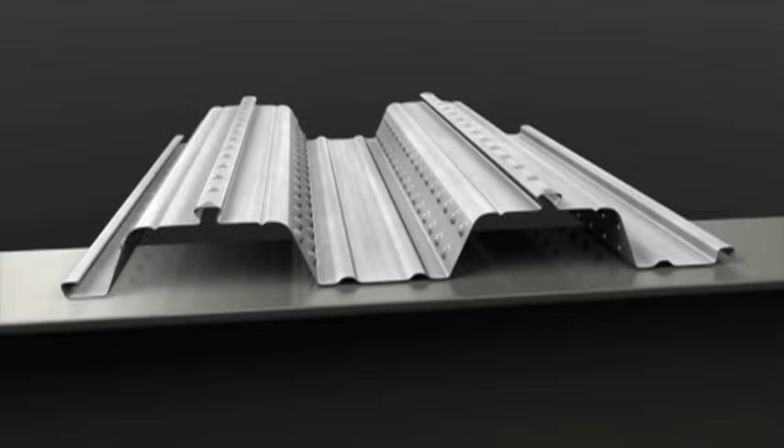ComFlor is a composite steel floor decking, ideally suited to modern high-rise structures. Available in both shallow and deep decks, the ComFlor range represents some of the most economical floor solutions and is arguably the most efficient choice of profile currently available anywhere in the world.

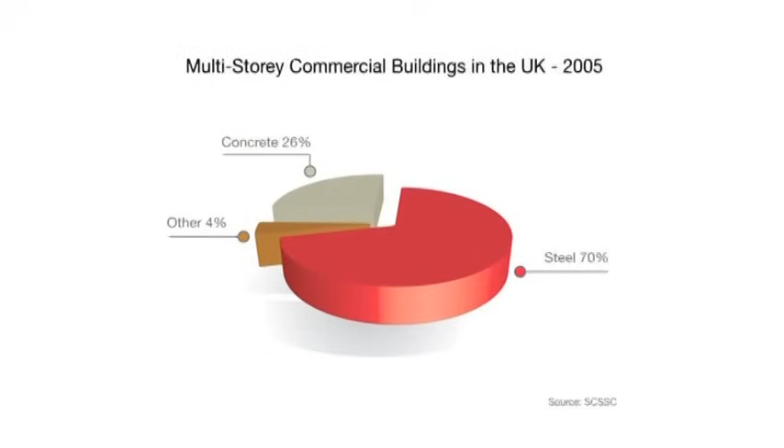A composite floor is one in which the steel deck mechanically bonds with the concrete topping, so that the steel and the concrete work together to form the floor structure. The technology reached the UK at a time when concrete had a dominant three-quarters of the market for multi-storey building. The introduction of steel profiles using composite slab technology changed the market forever. And today, 70% of multi-storey buildings are steel framed.

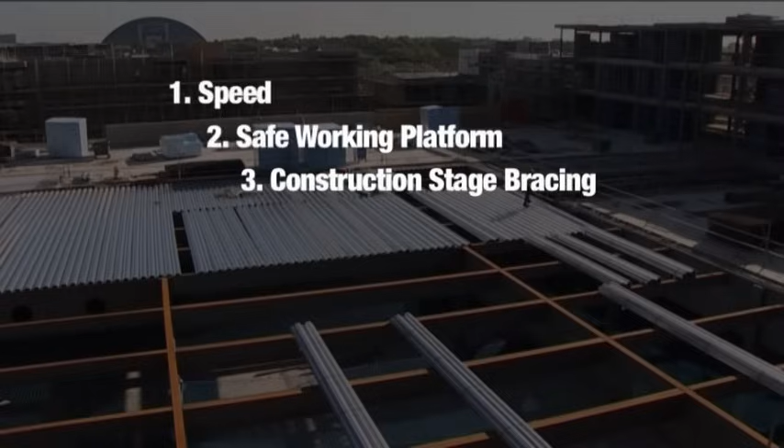The principal benefits of building with a composite steel flooring system are increased speed of construction. The deck instantly acts as a working platform. Construction stage bracing, providing diaphragm action to the floor. Reduction in the weight of the floor. Overall building height reductions. Inherent fire safety properties, and the simplicity of attaching building services.

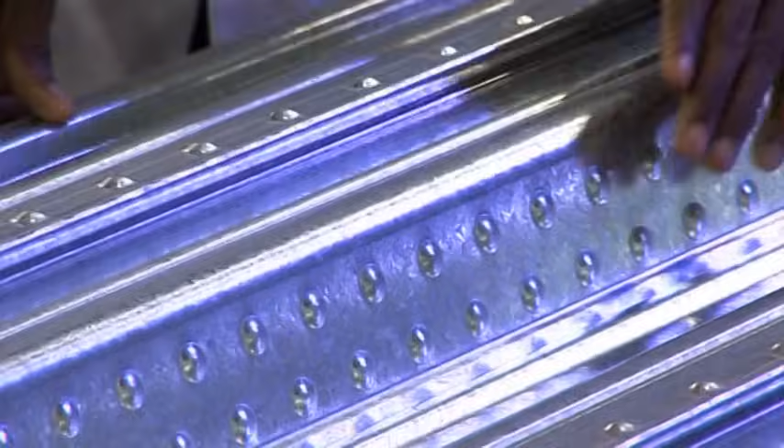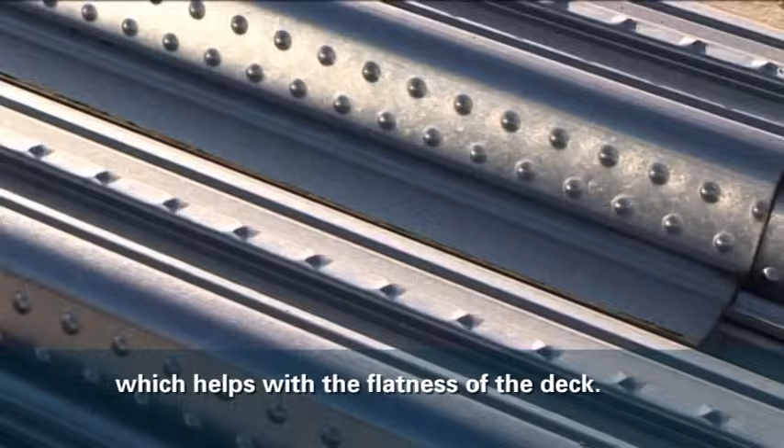Circular embossment in particular reduces the amount of distortion created during the rolling of the deck. This later leads to reducing residual stresses within the profile, which helps the flatness of the deck. The embossment along with the round edges increases shear bond action between the deck and the concrete slab, and has led to an increase in the m-k value found from the tests that were carried out here at Imperial College.

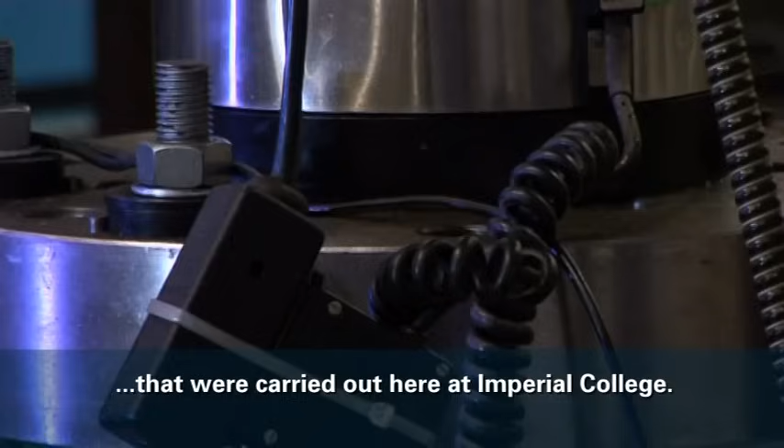As with any construction product, this decking is tested to European standards: Eurocode 3 for cold-formed steel and Eurocode 4 for composite slabs and beams.

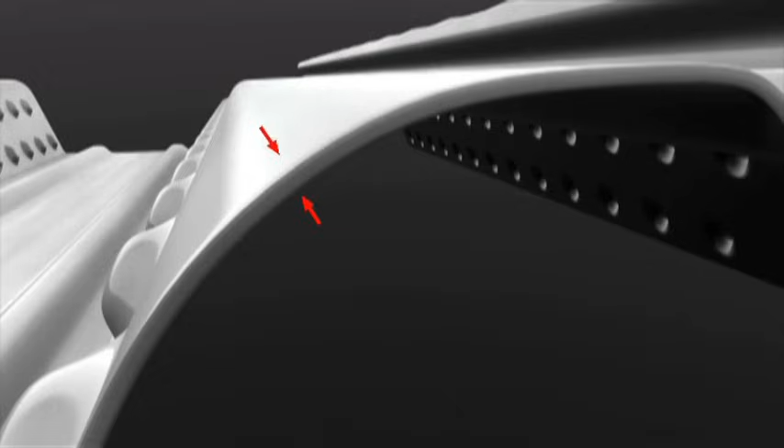The ComFlor 80 and the ComFlor 60 profiles were designed to span further in the unpropped condition than any other profiles in the world. Having a profile that spans further is only half the story though, because in floor areas where the spans are not so important, it means the gauge thickness can be reduced. Smaller gauge thicknesses mean that the overall floor cost can be dramatically reduced.

Deck design is not an exact science, however, one of the key areas for the design of these profiles is to try and ensure that the cross-section of the profile is fully effective. The introduction of the large corner radii is to reduce the individual element lengths of the compression zone of the profile. The CF60 and the CF80 have circular embossments.

The purpose of these circular embossments is to ensure that the concrete works with the decking. They put less stress into the profile, which actually means that there's no twisting of the profile. So when it's laid in situ, the decking actually sits firmly onto the top flange of the beam.

When you look at the cross-section of these new profiles, you'll notice that the bottom stiffeners in the trough have actually been pushed apart, as opposed to a traditional central stiffener. By doing this, the shear stud connector can be placed centrally within the trough, and this means that the stud will achieve its full capacity.

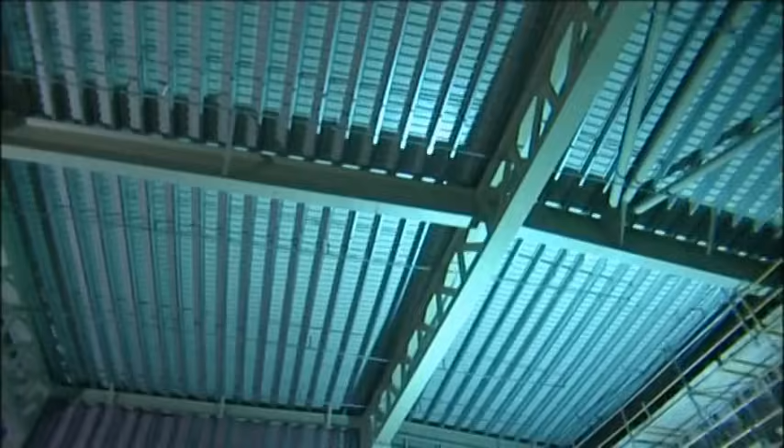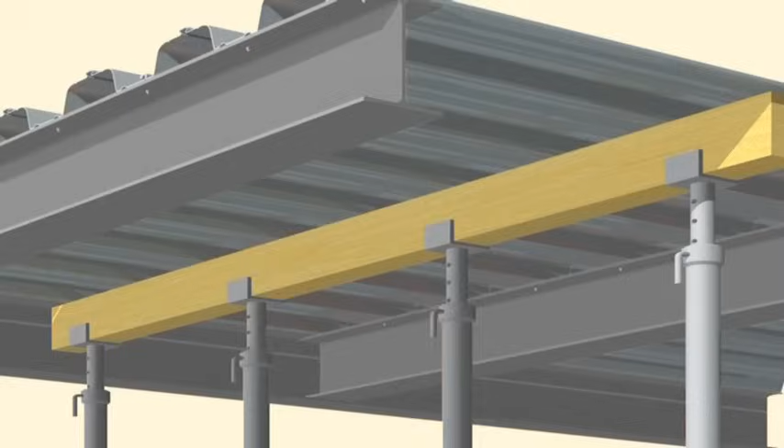ComFlor decking will span further than any other flooring deck profile. In the double span condition, ComFlor can span in the region of 4.5 to 5 metres without the need to prop. In a typical grid structure, traditional composite decks require a greater frequency of beams. The use of ComFlor can reduce the number of components by as much as 25%.

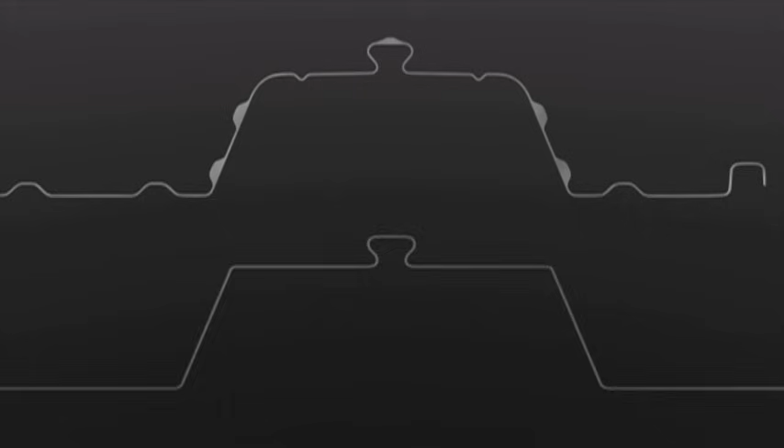Let's consider a typical crest configuration with a central stiffener. As the horizontal elements will at some point be in compression, it is important to keep the individual b/t ratios for these elements to a minimum. The location of the shear stud connector within the deck profile is of paramount importance. The latest ComFlor profiles only allow the studs to be centrally placed, which is the optimum position for developing the stud capacity.

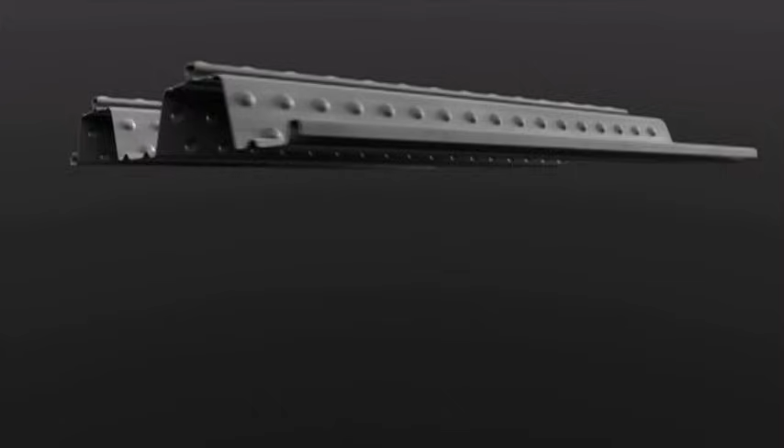Extensive testing and fire engineering work have resulted in fire ratings of up to 4 hours when using a light mesh within the composite slab and no protection to the deck.

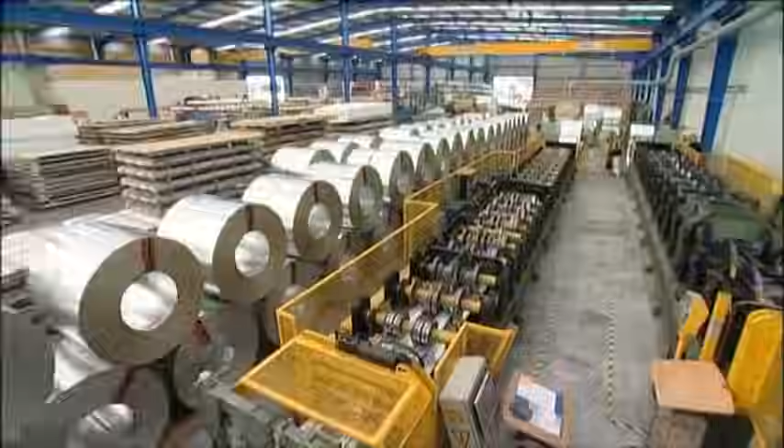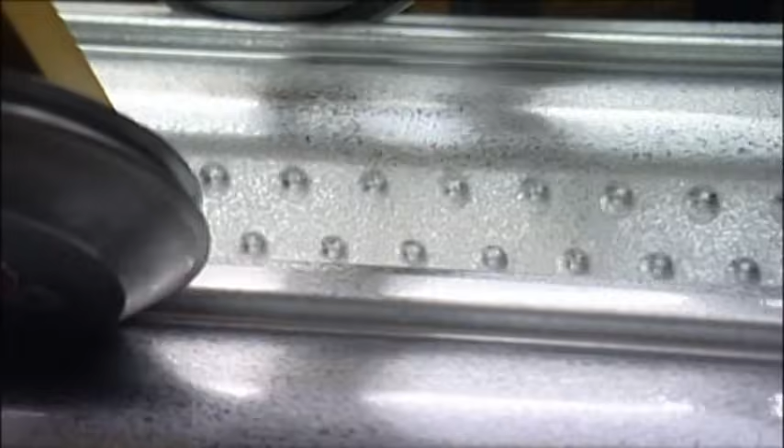We are proud that we have a very high quality controlled manufacturing process. At the beginning of each order, then at regular intervals, quality checks are carried out on the ComFlor. Only once these checks are satisfied will production continue.

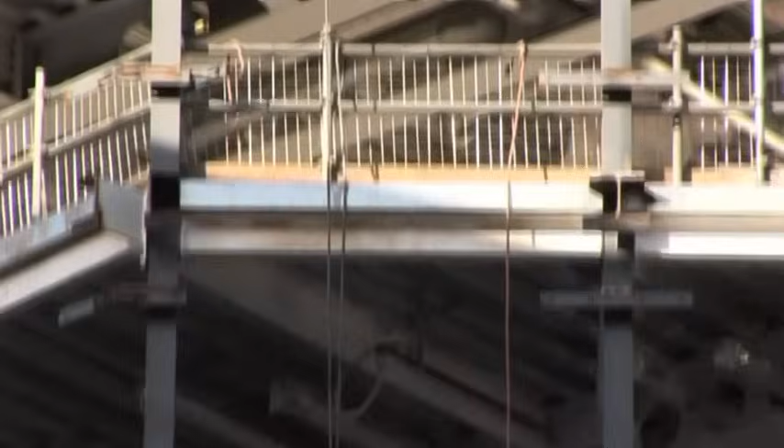ComFlor has gained great favour since the launch of ComFlor 80 in 2004, with hundreds of thousands of square metres supplied all over the globe and demand only growing as the world realises the great benefits of the ComFlor composite floor system.

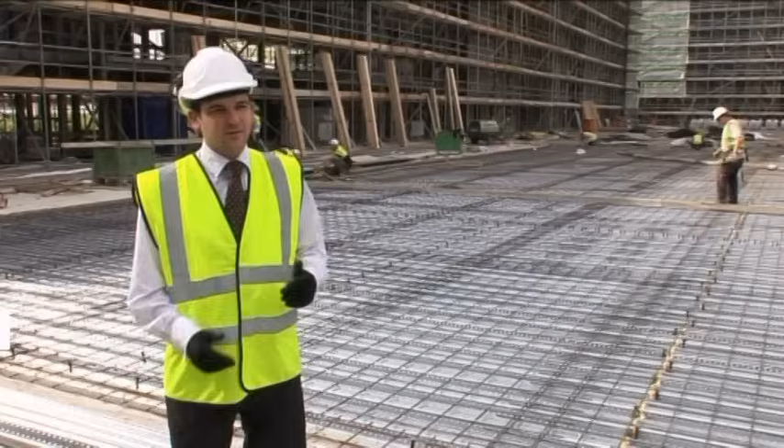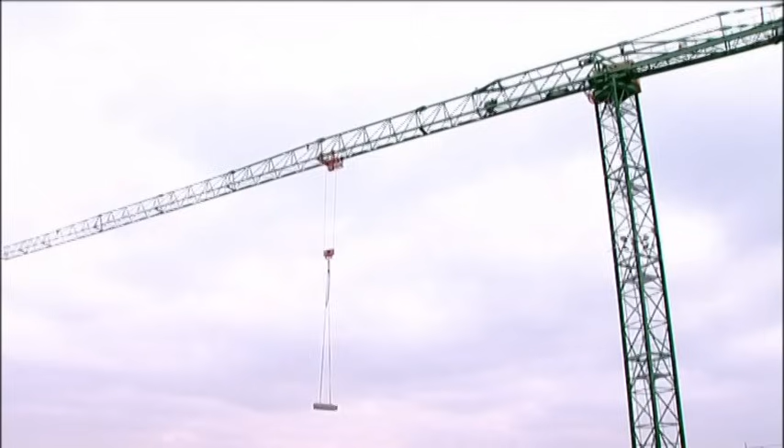Essentially, it starts when we've got our steel frame erected, and obviously we hang safety netting beneath the floor where we want to be working. The steel composite panels actually come in bundles on the back of a flatbed and are lifted onto site by crane, and typically then we take from these bundles of, say, 15 sheets, they're actually placed in position and then fixed to the beams.

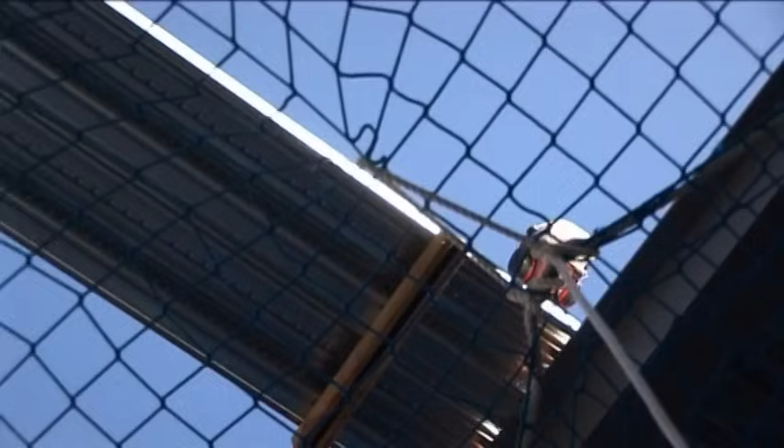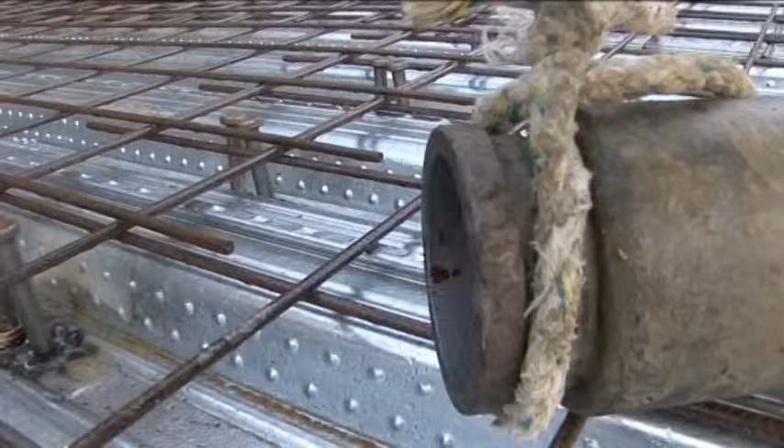Once the deck is then laid in position, it becomes a working platform, but also is a crash deck, and so allowing work to carry on unimpeded on the levels below. The shear studs are then taken and placed in position through deck welded onto the composite beams. The steel mesh is then laid, concrete poured, and then it's finished.

ComFlor is a high-quality composite decking product, manufactured with tight controls on testing and packaging. It has been proven to provide significant savings in both construction time and overall structural costs in buildings all around the world.

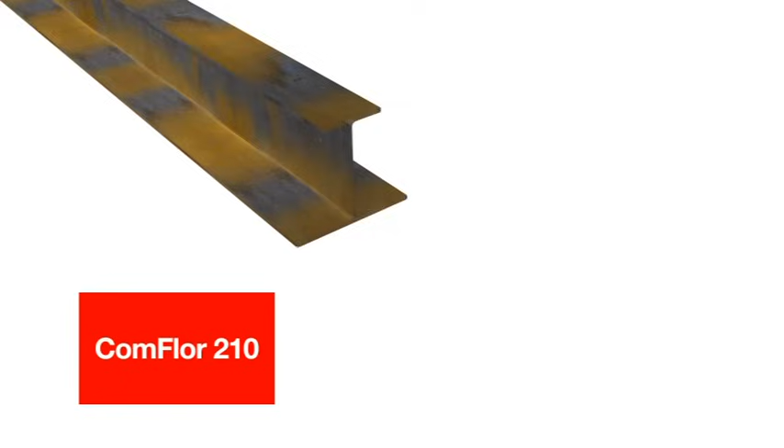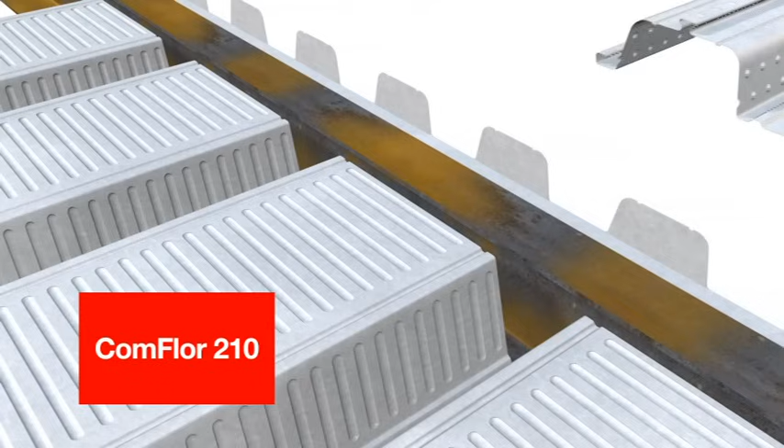ComFlor 210 was introduced to the New Zealand market in 2002 and has been used in the United Kingdom for over 20 years. ComFlor 210 is best used in a single span configuration, where the 210mm deep profile is fully or partially incorporated within the height of the supporting beam, resulting in a reduced story-to-story height when compared to using metal deck laid directly on top of the beam.

ComFlor 210 is very economical in terms of concrete volumes used. This is due to the deep beam-type troughs that provide the spanning strength, while the broad top of the profile minimises the amount of concrete used overall. ComFlor 210 suits construction that requires large spans, but also demands a thin overall floor system, that is the total floor system height inclusive of the beam.

ComFlor 210 has the longest unpropped spanning ability, over 5-metre beam centres. When temporary propping is used, spans of over 8.5 metres are possible.

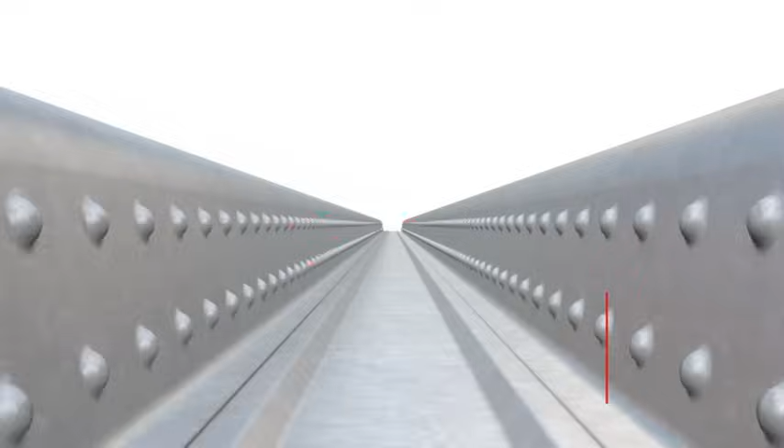ComFlor 80 was introduced to the New Zealand market in 2005 and has been used in the United Kingdom since 2004. ComFlor 80 is best used where long sheets continue over multiple beams to fully utilise the fantastic spanning capabilities and construction bracing properties of ComFlor 80. And as such, it suits high-rise construction and where a simple, large spanning and lightweight flooring system is required.

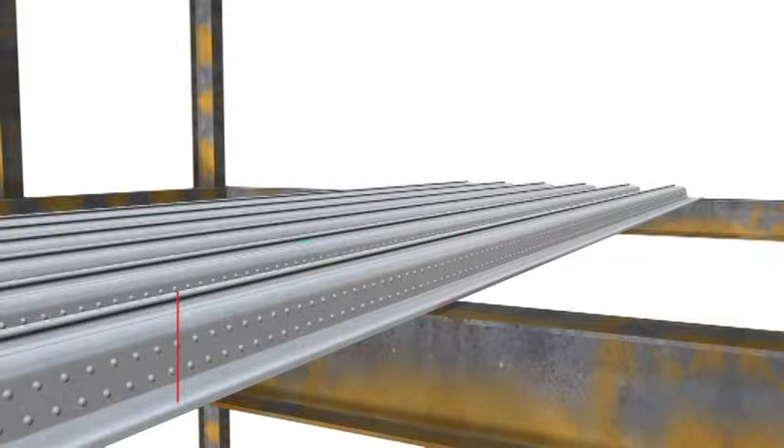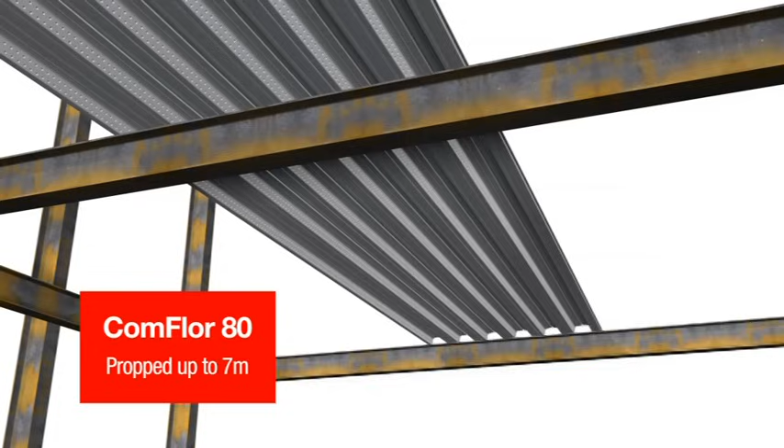ComFlor 80 is a great balance between economic concrete use and robust acoustic and fire performance, achieving 4 hours in fire testing without any modifications to the underside of the decking. ComFlor 80 can span unpropped to over 4.6 metre beam centres. When temporary propping is used, spans up to 7 metres are possible, meaning ComFlor 80 is a great all-round choice for your project.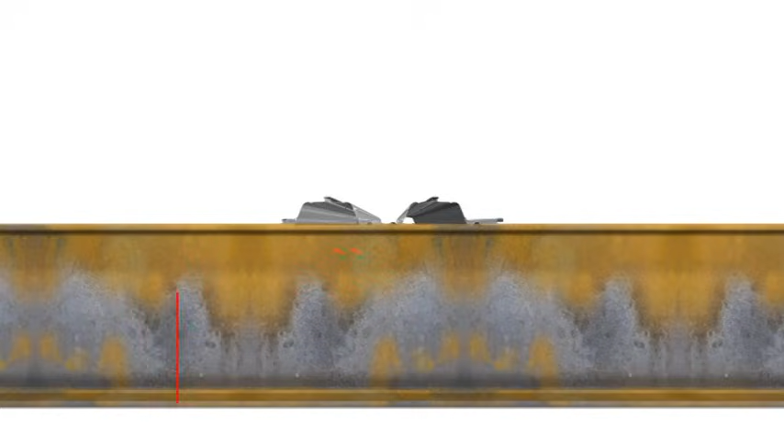ComFlor 60 was introduced to the New Zealand market in 2008. ComFlor 60 is similar in use to ComFlor 80, but is better suited when the thinnest possible slab is required or where acoustic, fire and vibration criteria are critical factors in the design. Using less material width in its manufacture, ComFlor 60 also comes at a lower unit cost than the ComFlor 80.

ComFlor 60 is great for commercial car parks and storage units, or anywhere a long-spanning concrete-efficient slab is desired with good solid performance characteristics. ComFlor 60 can span unpropped to over 4-metre beam centres. When temporary propping is used, spans up to 7 metres are possible.

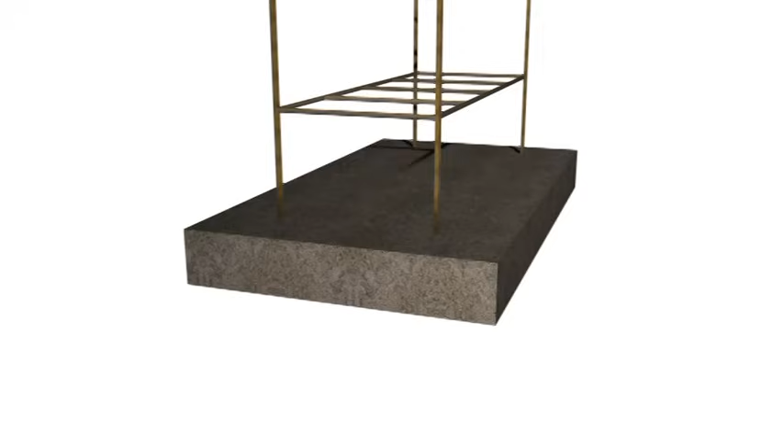The ComFlor range has many uses and can be used to good effect on virtually any substructure desired. The structure best suited to ComFlor, however, is structural steel. Structural steel combined with ComFlor saves weight, which gives huge benefits to foundation design and overall beam and column sizes.

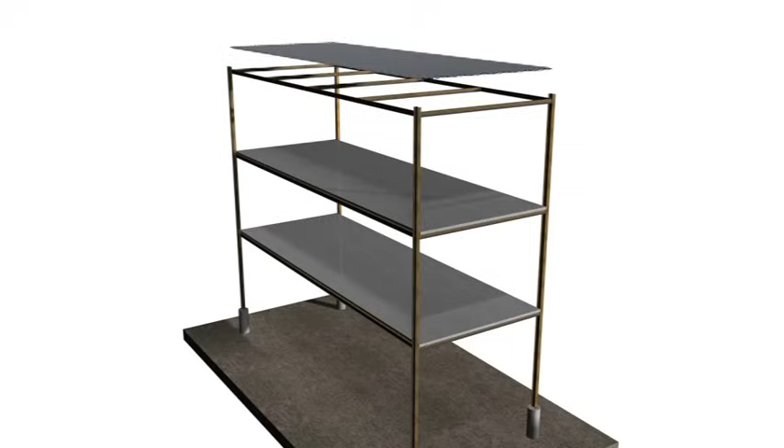ComFlor combined with structural steel speeds up the construction time, with a poured floor-to-floor turnaround sequence of 5 days not uncommon. This can save months of construction time compared to other styles of construction, leading to faster occupancy and return on investment. When used unpropped, services and other fit-out installations can proceed unhindered immediately after the ComFlor sheets are installed.

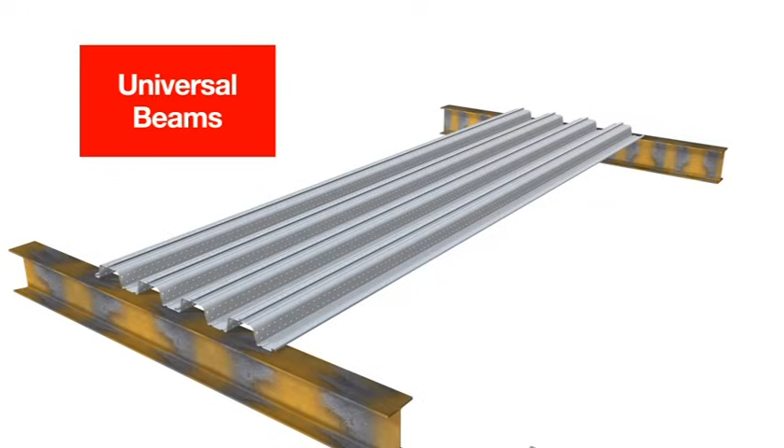Although structural steel is the best option, other support structures commonly used are masonry, precast units such as shell beams, and even in situ poured beams can be used to support ComFlor.

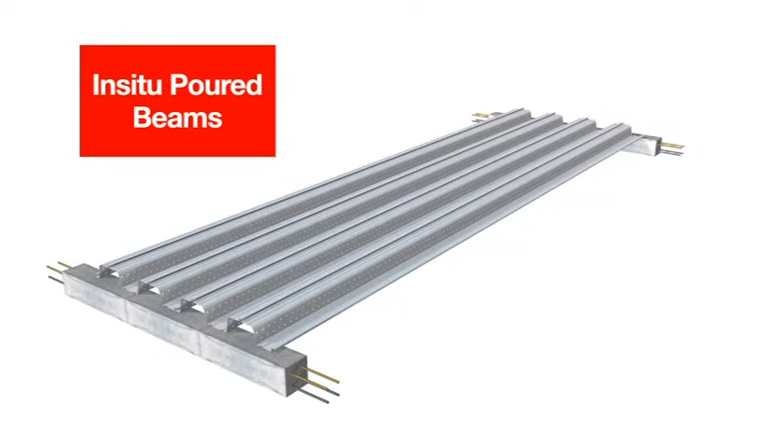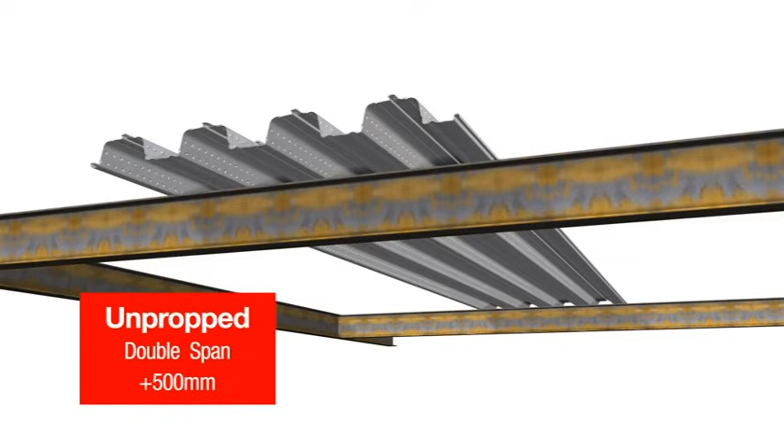ComFlor can be used propped or unpropped during construction. It's best to construct unpropped either as single-span sheets or as continuous sheets. A single-span design can be improved by approximately ½ a metre when continuous sheets are used, reducing the number of beams and saving the project unnecessary costs and construction time.

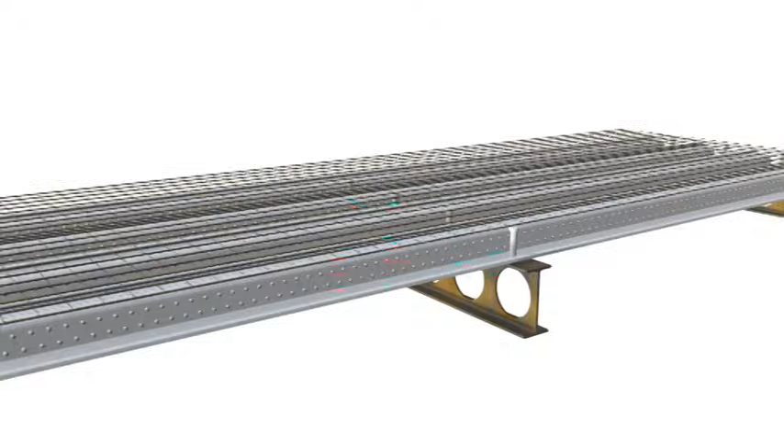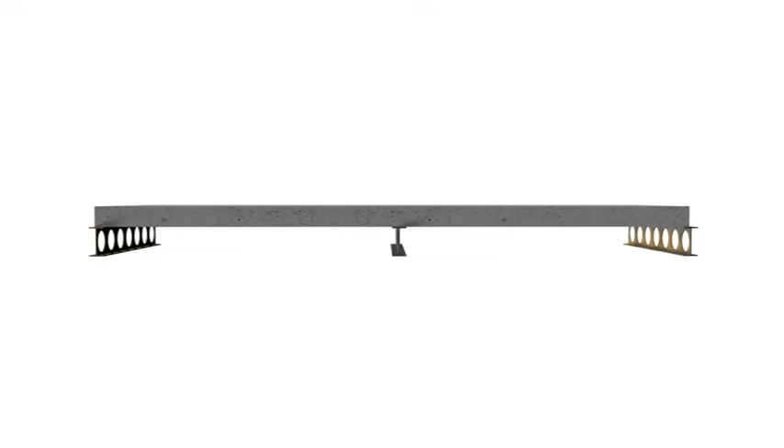If maximum spans are wanted from the ComFlor slab in service, propped construction can be used. Spans of 7 metres can comfortably be achieved, with spans over 8.5 metres possible. So within the ComFlor range, there is a product that will suit any application. ComFlor is a great balance between strength to support the wet concrete load, unpropped up to 5 metres, and lightness, with 2 people able to handle the longest lengths.

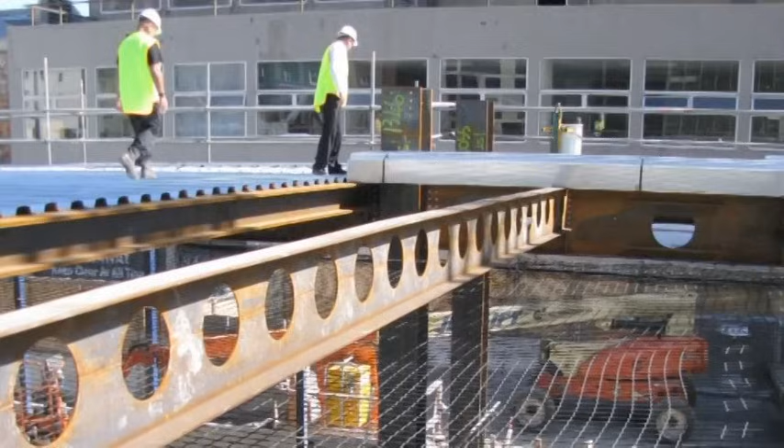The route to market for ComFlor is through Composite Floor Decks Limited. Nationwide, they can supply direct for self-install, or their specialty, a fully installed option including installation of decking, shear studs and edge trimming, ready for the placement of reinforcing and concrete. Composite Floor Decks Limited work professionally to achieve the project's time and safety targets.

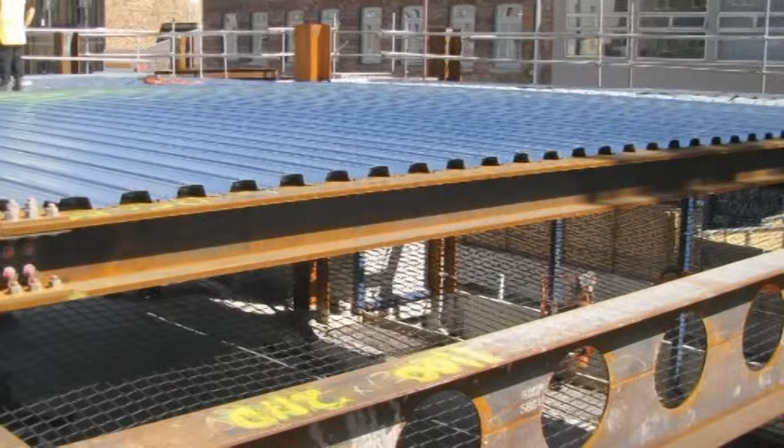Unique to Composite Floor Decks Limited is the use of safety netting. This provides a physical barrier for both people falling from the structure and workers below are protected from objects falling from above. The netting also allows workers to move freely about untethered, speeding up the construction process.

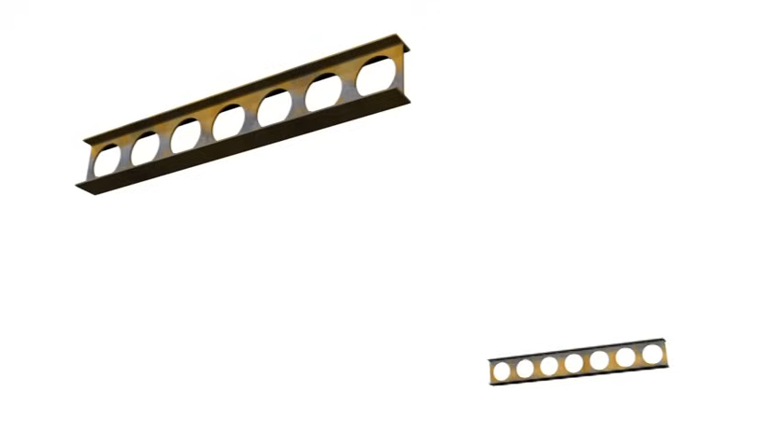There are 2 fundamental points to always keep in mind with regards to installing ComFlor, that if overlooked can cause safety and performance problems. Prop first. If used, temporary propping is best installed prior to laying the ComFlor sheets.

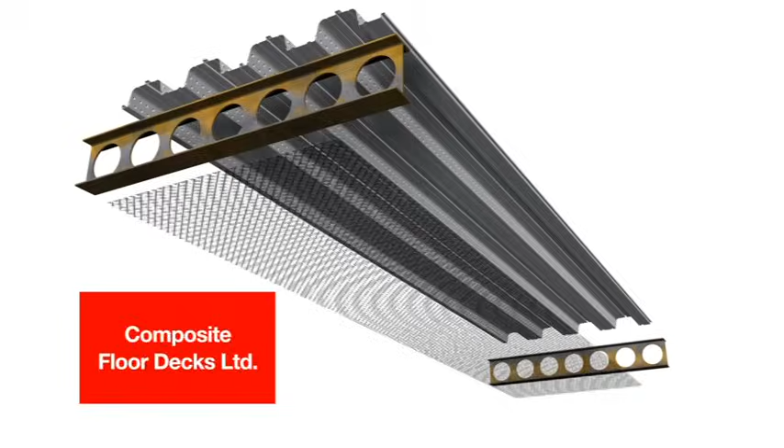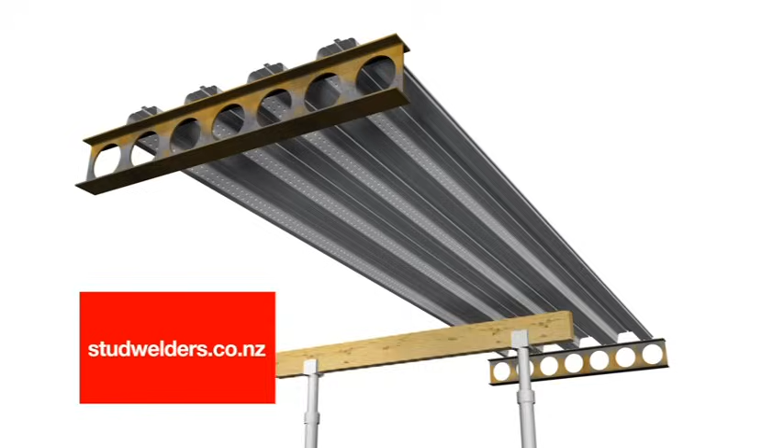Note, however, if using Composite Floor Decks Limited for installation, the temporary propping will interfere with the placement of the safety netting they use. Please contact Composite Floor Decks Limited in this instance. They'll advise if propping can be safely omitted during the ComFlor installation stage, as often it's required during the concreting phase only. Never cut sheets.

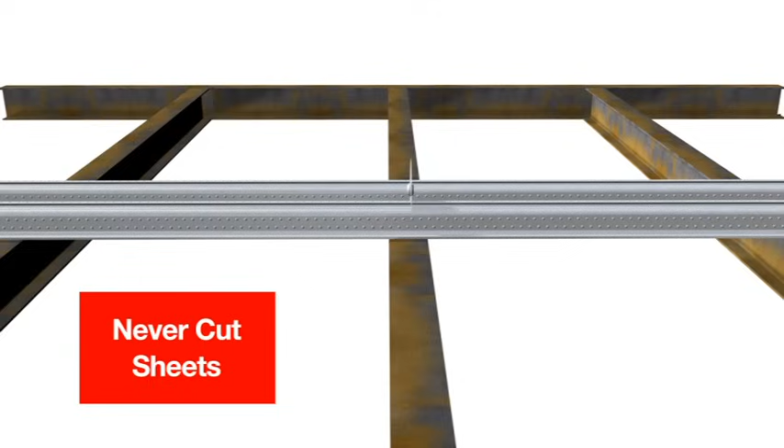ComFlor must never be cut shorter than that supplied or specified on the drawings, without first consulting a ComFlor representative. Cutting will reduce the spanning ability of the ComFlor and may lead to larger deflections during the pour or actual sheet failure under load. And never cut ComFlor mid-span under any circumstances.

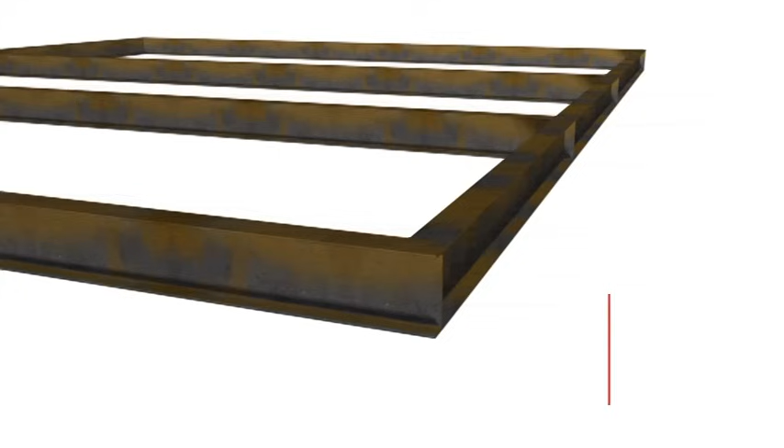ComFlor 60 and ComFlor 80 are installed in exactly the same manner. The ComFlor 210 installation process differs, however, and is addressed separately within this presentation. The strip end cap is most often used and is installed before the ComFlor is laid. For best results when using the strip end cap, the supporting surface should be smooth and free of debris.

ComFlor strip end caps are fitted flush to the inside face of the beam or concrete. Fixings are at third points, located so they don't interfere with the seating of the ComFlor sheets. A great benefit of the end cap strip is that they act as a set-out template for the ComFlor, negating the need for coverage or out-of-square checks otherwise required.

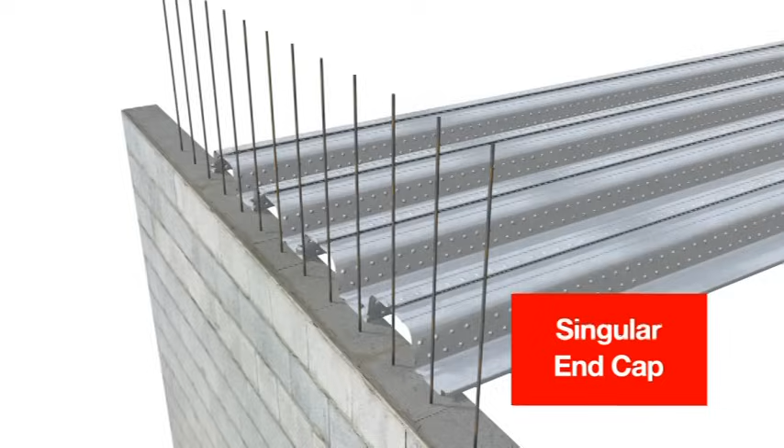The singular end caps are fitted after the ComFlor sheets are installed. They are cut from ComFlor closure angles, supplied in 2.4 metre lengths bundled together. Bundles are cut on-site into 200mm lengths using a metal-rated cutting disc.

Masonry blocks must be solid-filled and developed structural strength before laying and pouring the ComFlor. Care is also required to ensure the grout is smoothed off, providing a flat surface for fixings, and the reinforcing bars do not clash with the ComFlor seating area. Fix the ComFlor into the grout to avoid unsightly damage to the blockwork. For best results in masonry, pre-drill and hammer-in masonry anchors, one fixing per sheet.

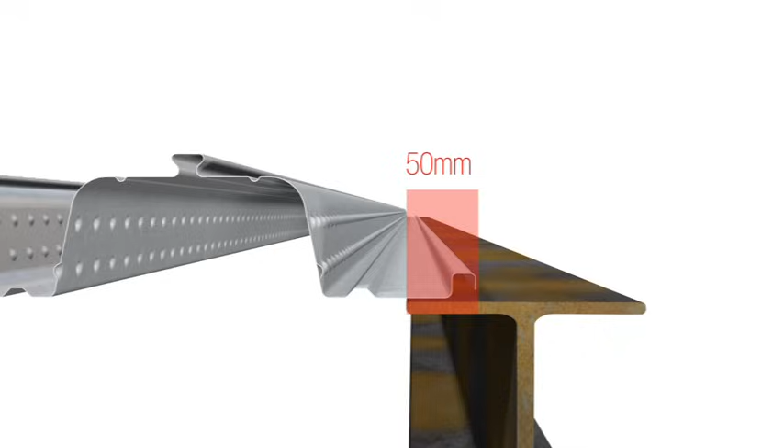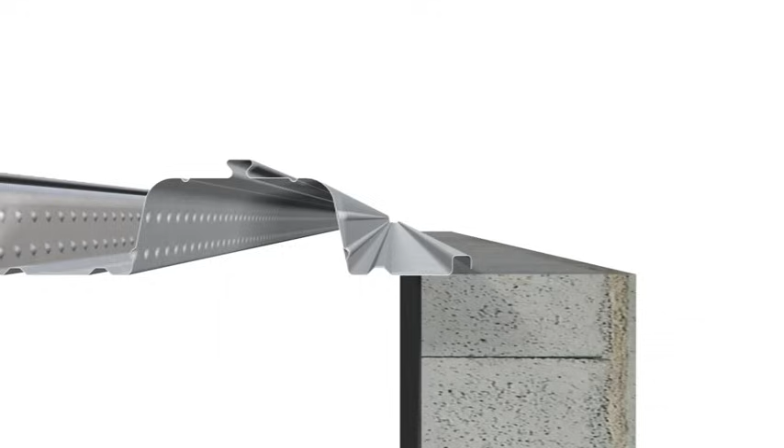Although less is possible, it's recommended the minimum seating for both the side and end of the ComFlor sheet is 50mm onto steel and 70mm onto masonry. This serves both as an additional safety factor, but more importantly avoids the need for precise measuring during installation. The first ComFlor sheet is always laid with the overlap edge facing the starting point.

ComFlor must be fixed to the permanent structure along the side lap at a maximum of 1 metre centres. As each sheet is laid, it is fixed to the permanent support, one fixing per sheet. Please ensure that the drive pins fixing the sheet do not clash with any future shear stud placements. An ideal location is at the base of the rib upstand as shown here. They are then TEC-screwed together through every second pre-punched hole, resulting in fixing at no more than 1 metre centres.

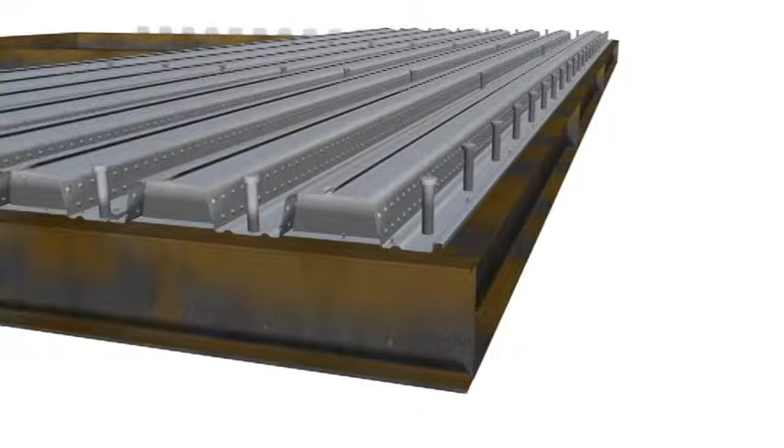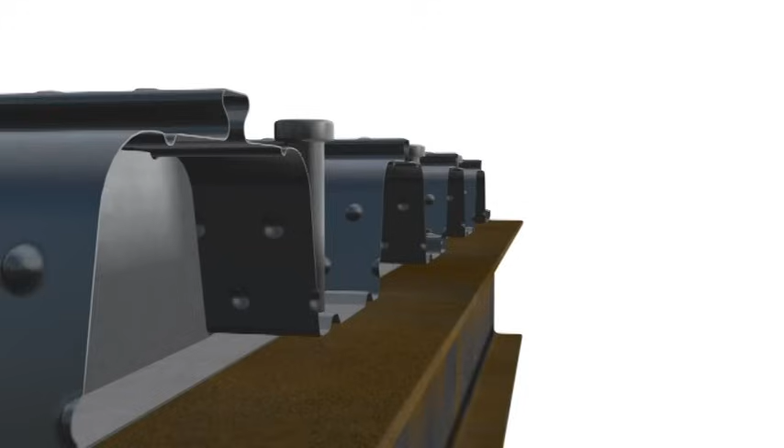Often, shear studs are used to create a composite design, meaning a much smaller beam can be used than for a gravity beam design. Shear studs are best installed in a through-deck fashion. That is, studs are welded on site after the ComFlor is installed. This results in a faster installation sequence, and the ComFlor sheets act as a bracing diaphragm to the structural steel during the construction phase. The top flange of the steel beam must be unpainted and free from dirt, debris and moisture to ensure an effective weld is achieved.

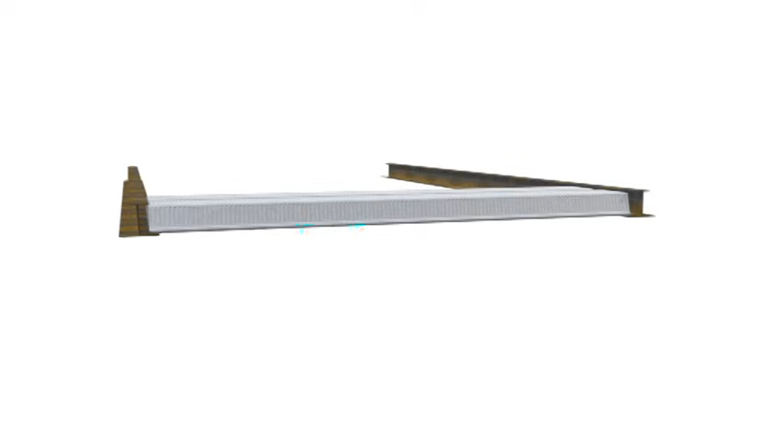ComFlor 210 is typically installed as a single span only. That is, the sheets tend to span beam to beam or wall to wall, and not over the top of multiple beams or walls, as is best practice for ComFlor 60 and ComFlor 80. To fully utilise the benefits of ComFlor 210, it's usually incorporated within the height of an asymmetric beam support system, thereby reducing overall storey height.

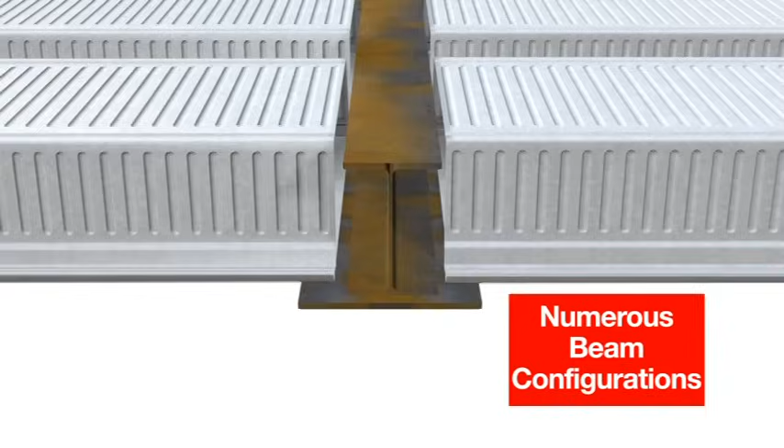Numerous beam configurations are possible with ComFlor 210. For best results, contact your ComFlor representative and discuss your project's needs. Asymmetric beams focus the tensile capacity towards the bottom of the beam, maximising performance while keeping the overall floor height to a minimum. Fabricated asymmetric beams can currently be sourced from Steltec, Cellbeam and Fabsec.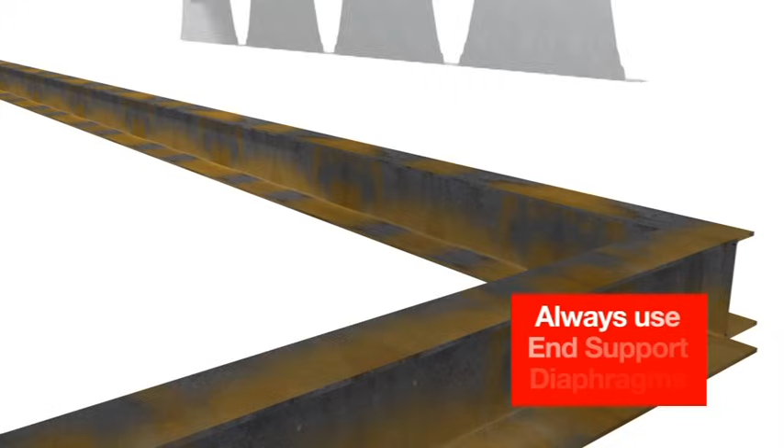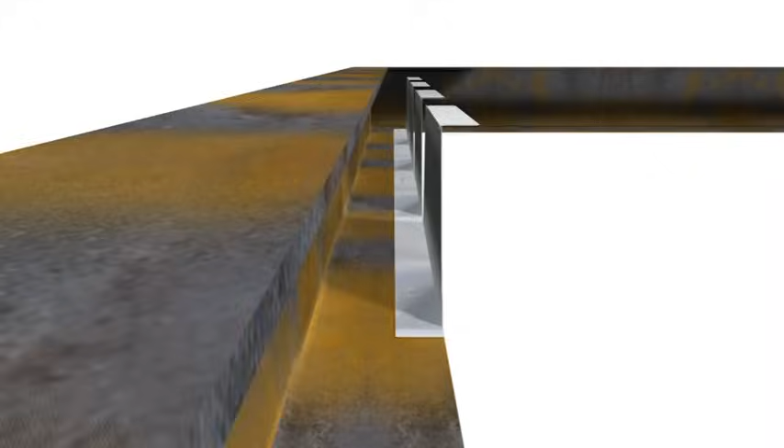When installing ComFlor 210, the end support diaphragms are always used and are installed first, as they're a vital structural component that supports and maintains the correct shape of the ComFlor 210 under construction loading. The ComFlor 210 end support diaphragms are fixed down at third points so as not to interfere with the seating of the ComFlor sheets. Please note the orientation of the end support diaphragm, as this will affect installation if not correct.

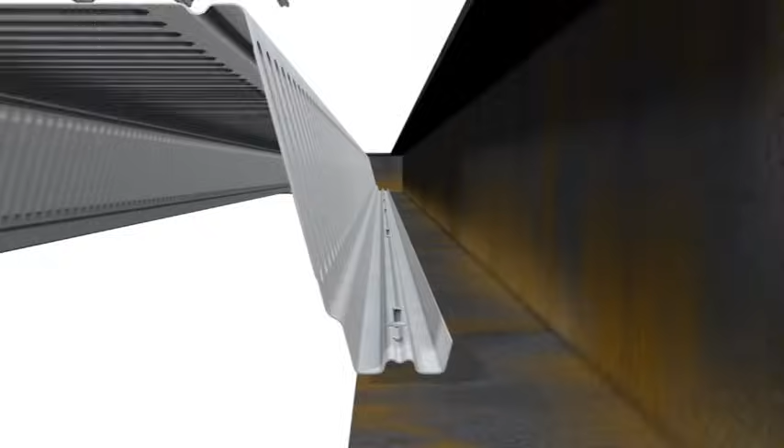The first sheet of ComFlor 210 must be laid so the edge with the punched holes faces the starting point. The edge lap is fixed at 600mm centres with heavy-duty drive pins. Subsequent sheets are then placed down on the preceding one, so the pre-punched holes are always visible from above. As each sheet is installed, they are Tek screwed into the top flange of the end support diaphragm.

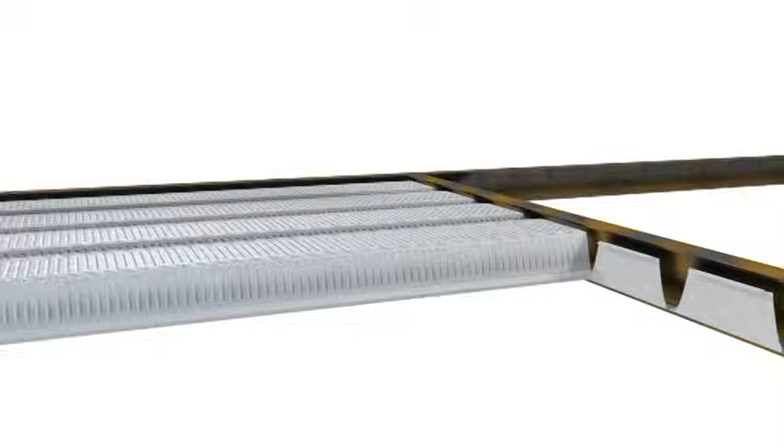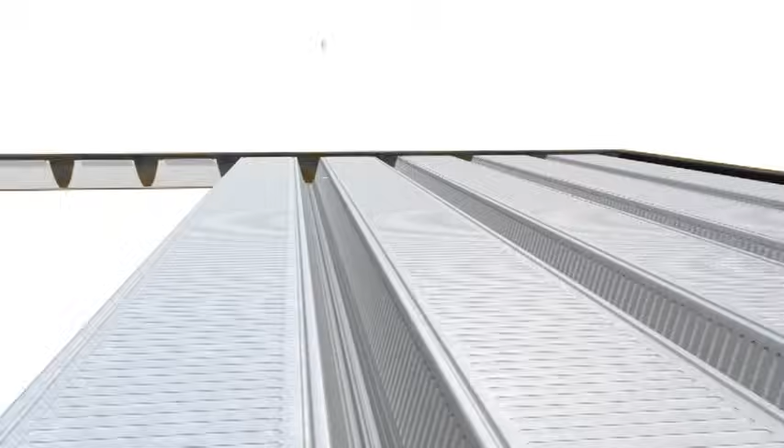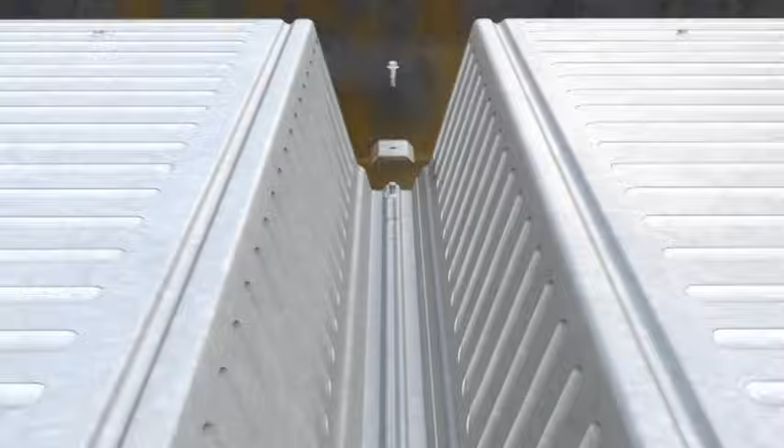For spans under 6.5 metres, all sheets can be laid before any side lap fixings are installed. For sheets over 6.5 metres, one shear bond clip is Tek screwed at mid-span as each sheet is installed. This ensures worker safety and sheet integrity during the installation sequence. Once all sheets are installed, the ComFlor 210 is fixed to the beam through every trough with heavy-duty drive pins. And shear bond clips are fixed at 350mm centres, that is through every pre-punched hole.

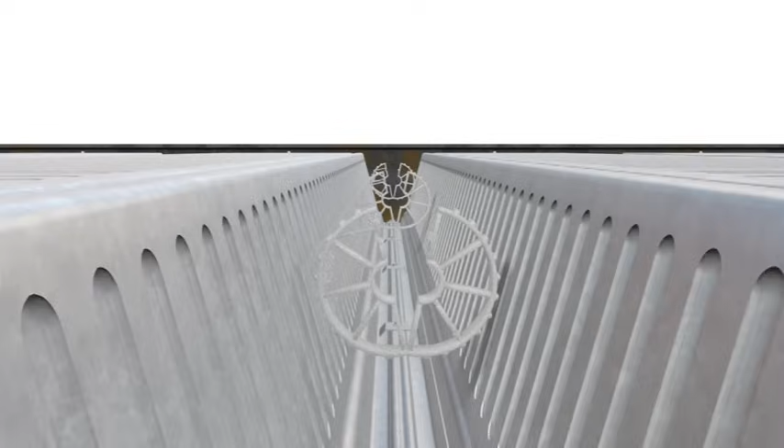ComFlor 210 requires a reinforcing bar in every trough to achieve the required shear bond characteristics, the size of which is determined by the ComFlor design software. The rebar is held in position using a standard 100mm circular spacer. Placement of mesh completes the basic ComFlor slab and is now ready for the concrete.

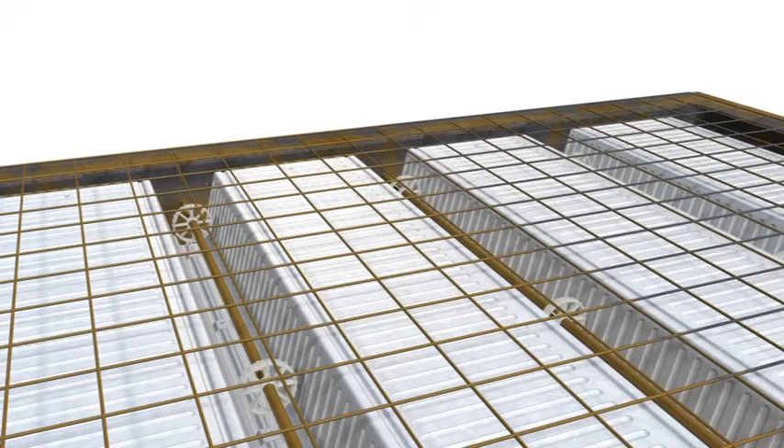The minimum end seating for ComFlor 210 is 50mm, but to facilitate installation tools, concrete flow and vibrator access, a 75mm shelf should be provided. This is to ensure a 25mm clear vertical access zone is available between the top flange of the beam and the ComFlor sheet. Where this is impractical, the top of the ComFlor can be cut out locally, but care is needed to avoid cutting the end support diaphragm. This extra cutting work should always be itemised and allowed for when seeking quotes or pricing any ComFlor 210 installation.

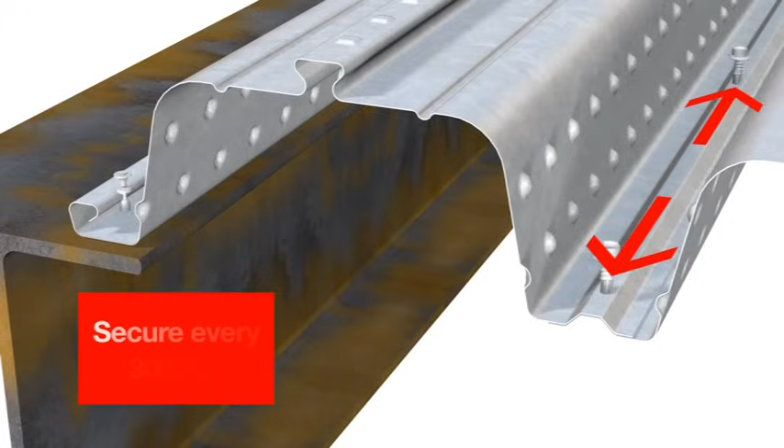There are several specialised accessories available for ComFlor. Closure plate is used where the 600mm cover width of ComFlor doesn't quite fit the structure. Closure plate can be used for gaps up to 140mm edge to edge. Alternatively, the ComFlor sheets can be split and spliced back together. In both cases, TEC screws at 300mm centres must be installed to maintain the structural integrity of the splice.

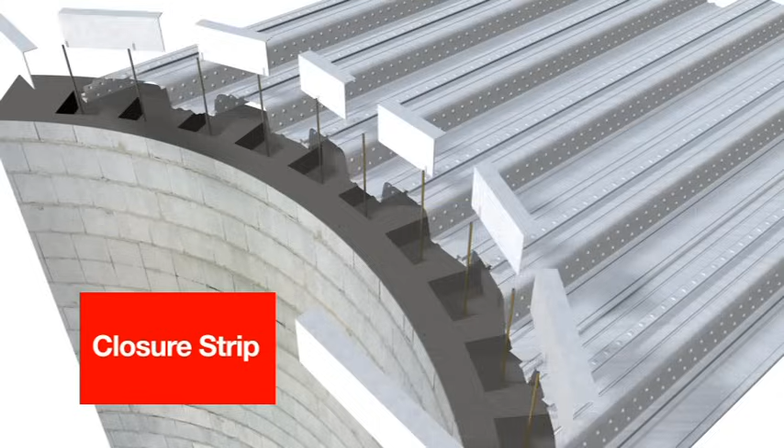Closure strip is used to block the ComFlor sheet ends to stop concrete escaping. Supplied in 2.4 metre lengths, it's cut to create single end caps, 200mm wide for ComFlor cut square. For curves and angle cuts, the closure strip is cut to suit. It's never installed as a solid strip.

For ease when forming the slab edges, use the ComFlor edge trim available for any slab thickness. ComFlor edge trim is fixed either to the steel beam or to the ComFlor itself. Restraint straps at 600mm centres stabilise the edge trim against concrete load. Consideration should be given to the installation of any perimeter reinforcing. Often this needs to be installed prior to the restraint straps to avoid rework. Edge trim must never be stepped upon. It's designed for horizontal loading only.

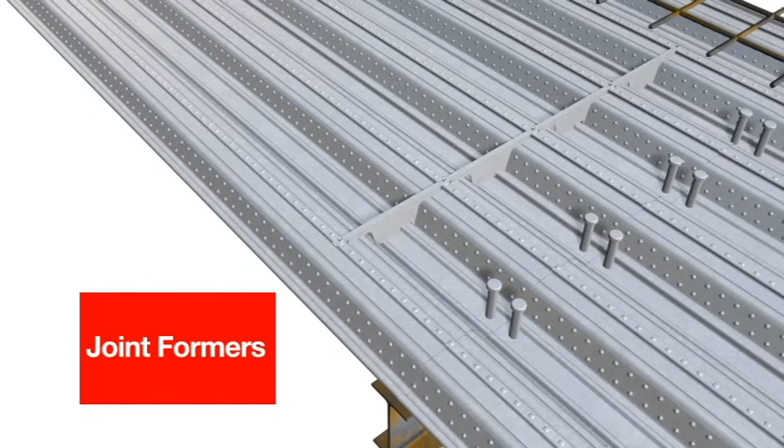The construction joint former matches the shape of ComFlor 60 and ComFlor 80 and is designed to reduce concrete seepage when forming construction joints or when forming voids that will be cut out after the concrete pour. Timber backing is used to form the slab height and provide horizontal stiffness. The ComFlor construction joint former can easily accommodate bottom reinforcing, will not interfere with mesh placement and is fixed to the top of the dovetail portion of the ComFlor.

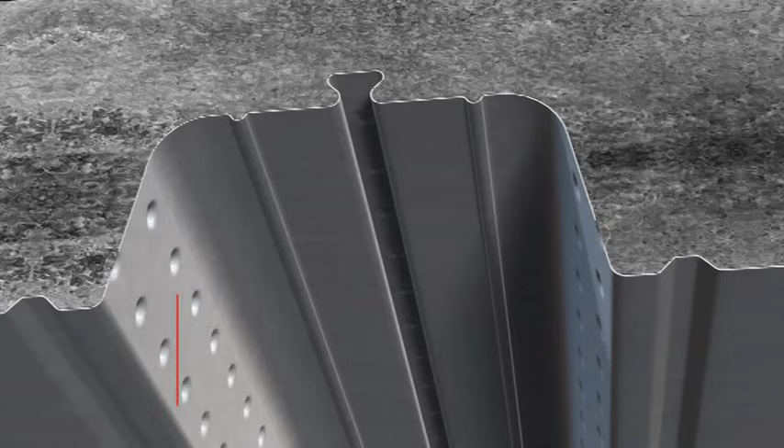ComFlor hangers are available for ComFlor 60 and ComFlor 80 only. The ComFlor threaded wedge nut is best used for heavier loads. For loads up to 50 kilograms, a GTD type hanger can be used. Threaded rod and terminal fittings are typically supplied by those